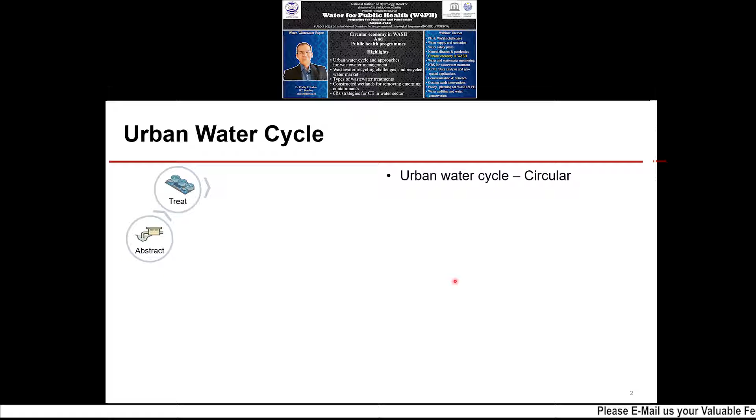First let us understand the urban water cycle. The natural water cycle is always connected. We abstract the water, treat the water, distribute, consume. Then there is a wastewater treatment plant, and then there is disposal. So this is our urban water cycle - that is how we are doing it.

But currently, a lot of urbanization and different stresses are causing impact, and this cycle has become linear. That means we are abstracting, treating, distributing, consuming, and again treating and disposing of, but there is no recycle or reuse happening. We are polluting the water systematically.

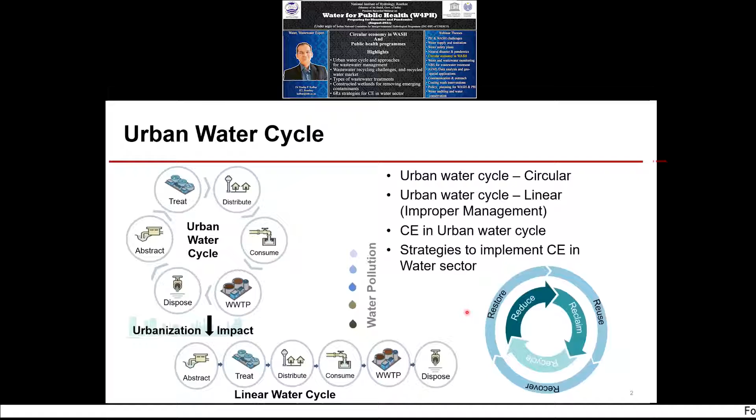So it is very important to have a circular economy approach in the urban water cycle, and there are strategies to implement circular economy in water. In this presentation, I will be talking about reducing consumption first of all, reclaiming, recycling, reusing, recovering, and restoring the water in different forms in different sectors that we come across.

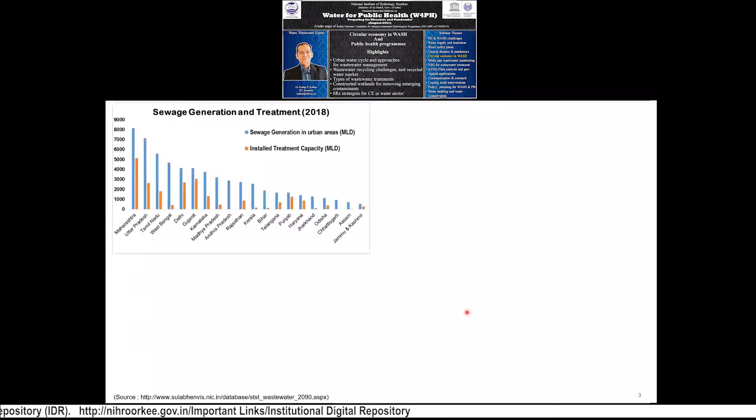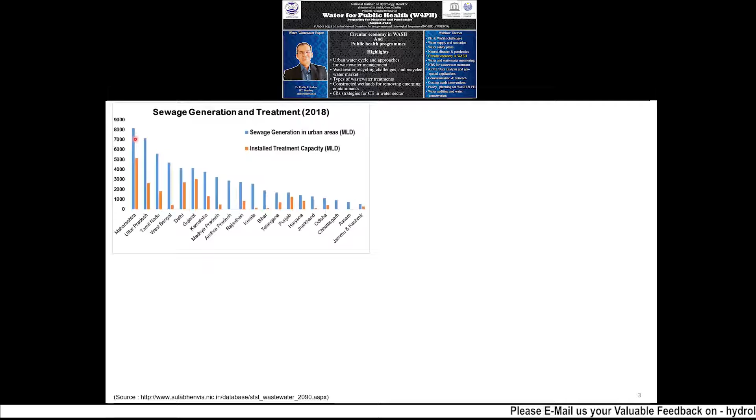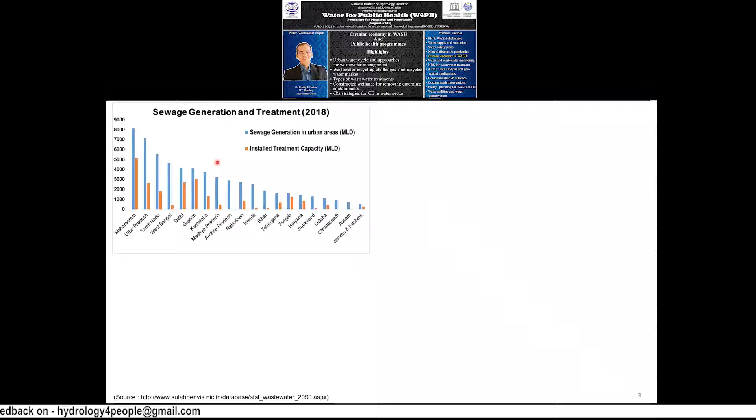First, let us take a look at sewage generation and treatment. This is very recent data across the states - you can see all the states are polluting, generating a lot of sewage, which is polluting rivers and lakes. We have a treatment gap. Some states are trying hard to create sewage treatment infrastructure, while some states are lagging - for example, West Bengal, Kerala, and Bihar.

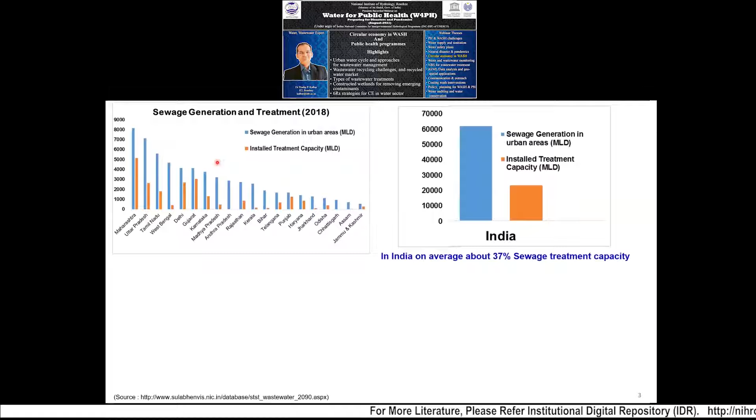These are the states which are lagging, and some states are going further, but still the gap is huge. So across India, on average, there is only 37% sewage treatment capacity. That is the challenge we have - a huge treatment capacity gap.

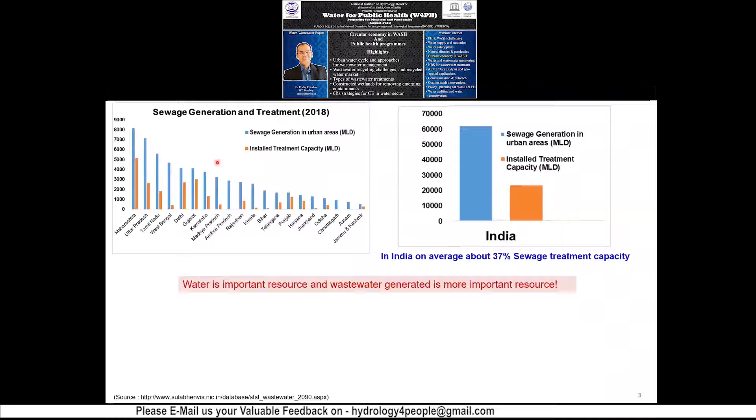Water is an important resource, but generated wastewater is an even more important resource. We always talk about fresh water, but wastewater generated is more important because it also has a carbon capacity to generate energy. There is nitrogen, there is phosphorus - many of these nutrients and resources are there. So it's a very important resource.

If you look at the installation capacity, we have around 1600 STPs across India, with around 37,000 to 38,000 million liters per day treatment capacity installed. Out of that, operational STPs are only around 1,100, and operational treatment capacity is around 26,000 to 27,000 million liters per day.

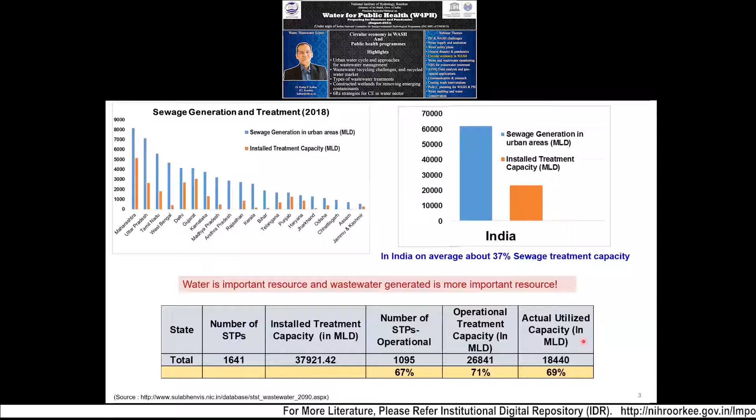We also have a problem with utilization, because many times treatment plants are installed without thinking whether there is a feeding network available, whether sewage collection is happening or not. People enthusiastically install sewage treatment plants without considering other sanitation aspects - whether people are using toilets, whether people are connected with the sewerage system or not. So capacity utilization of the entire infrastructure in the water sector is a big challenge.

So what happens is we have to treat the sewage, the untreated grey water, to some treatment standard. Historically we have been following Schedule 6, which comes from the Environment Protection Act 1986, where we have been given guidelines that we have to treat the water for 30 milligrams per liter.

And if there is public sewers, the municipality will have a sewage treatment plant, and they will treat it back to 30 milligram per liter so that it can be disposed of in lakes and rivers.

But the problem is, historically we have these guidelines, but our lakes and rivers are still polluted even with these standards. So a lot of public interest litigation has been filed in the Honorable Supreme Court, and now the Honorable National Green Tribunal is also taking cognizance of these cases. So these standards were challenged many times, questioning whether 30 milligram per liter is sufficient for maintaining good water quality in the systems. So we then have desired water quality for recycle also.

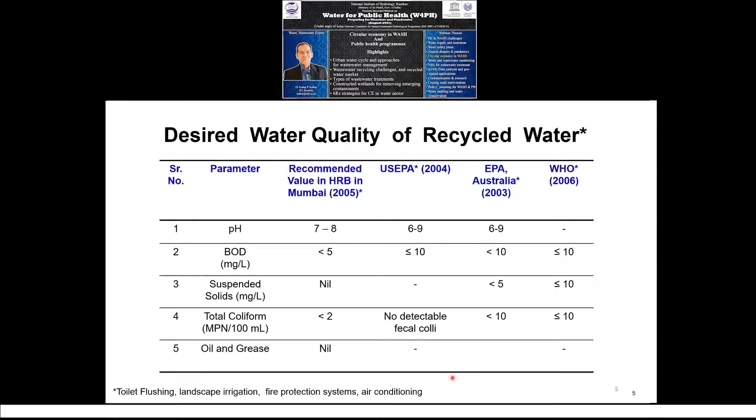So the thought was given that all high-rise buildings that are 21 stories and above will have recycling of sewage. However, the challenge is how we can enforce it, because enforcement in India is not done very properly. So although the norms are there, implementation is a big challenge.

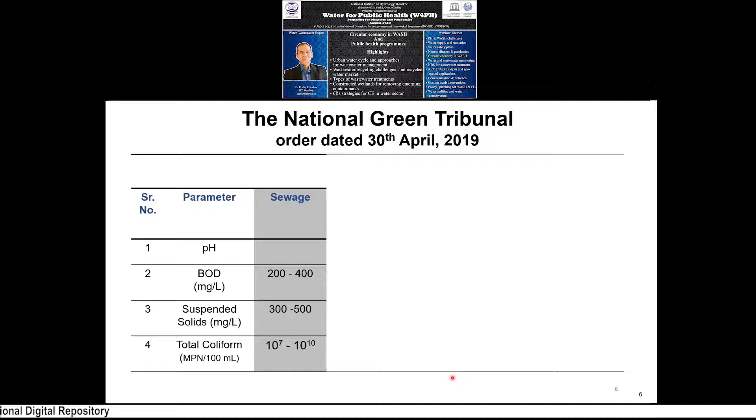Now, as I said, the Honorable National Green Tribunal has taken cognizance of the PILs that have been filed, and there was a lot of deliberation by committees, and then they issued an order on 30th April 2019 regarding the standard for treated sewage.

This was the committee's recommendation to the NGT, that in metro cities like Mumbai, Chennai, Delhi, Hyderabad, you have BOD of less than 10 milligram per liter for discharge into ambient water sources such as lakes and rivers. For class 1 cities, meaning population of 1 lakh and above, it is 20 milligram per liter, and for other tier 2 cities, class 2 cities, or emerging towns and rural areas, it is 30 milligram per liter.

Now what has happened is, they have said all water resources are the same, and we cannot differentiate between rural and urban areas, so these standards are applicable to all cases. So this is the recent order issued by the National Green Tribunal.

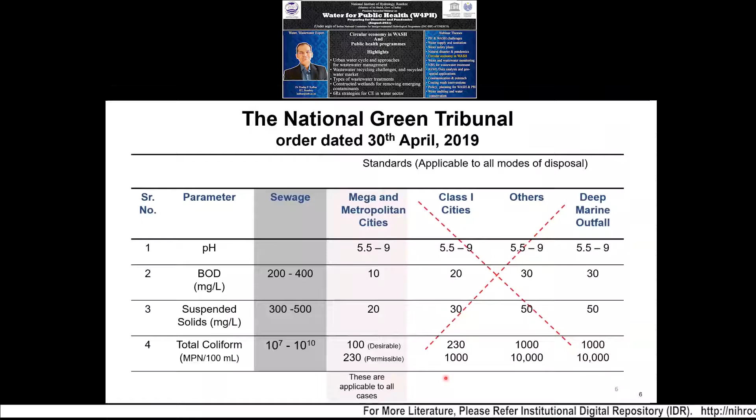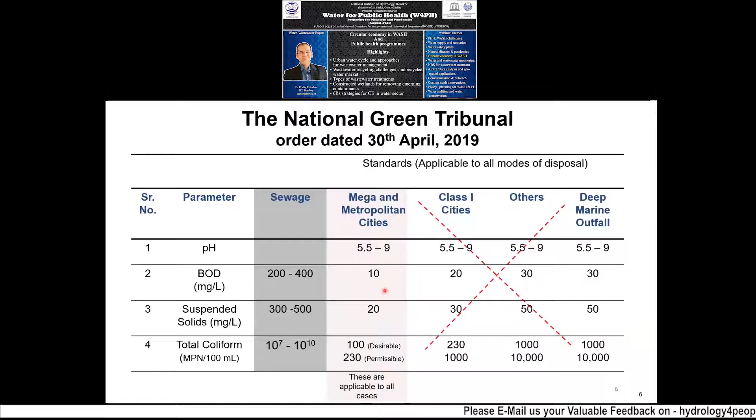Now this poses two challenges. One is that, as I told you, 37% is the established sewage treatment capacity, and those are for 30 milligram per liter discharge standards. Now all of that 37%, around 26,000 to 37,000 million liters per day, has to be upgraded to the 10 milligram per liter standard. So that is one big challenge for us.

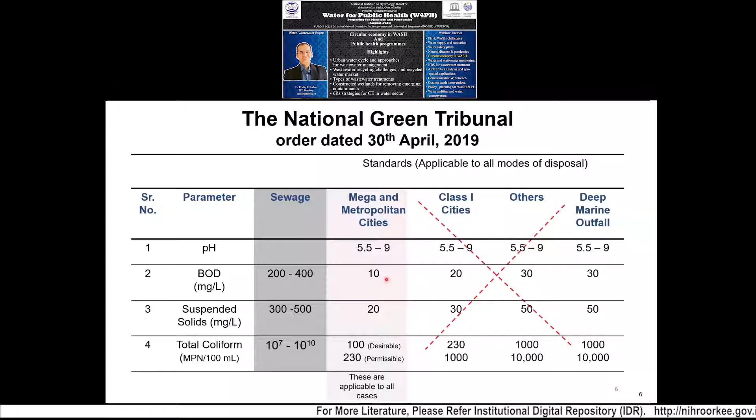And then also, filling the gap of the remaining infrastructure, about the remaining 63% capacity to be installed in coming years, it has to also meet this 10 milligram per liter standard. So basically our local bodies and state governments need huge funding and support for creating this infrastructure.

So we need very different approaches for wastewater management to achieve these targets, to respond to these disasters, pandemics, and new regulations. So let us understand the prevention and conservation side of wastewater management.

First, we have to educate our people and citizens about reducing consumption and putting in efficient devices, because that is the major role it will play in terms of reducing the stress on fresh water. If we are not working on this and only talking about treatment, we will never be able to catch up with the problem. So that is one big arm that we have to work on.

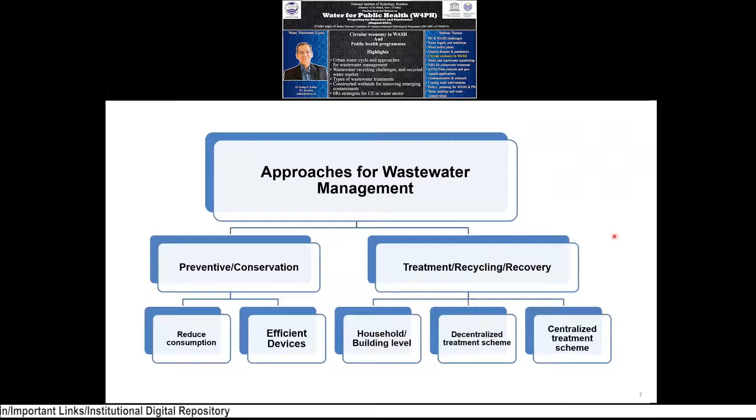And then you talk about treatment, recycling, or recovery. So we have to start with treatment, but now we have reached the stage where investing only in treatment is not possible, because even if an urban local body gets capital funding from the World Bank, state government, central government, or any other organization, the operational cost itself is not able to be coped up by urban local bodies. So we have to make this treatment side a revenue side. We have to recycle and recover, and the policies and guidelines around that need to be developed. So we have household or building level treatment, decentralized treatment systems, and centralized treatment systems.

So at all levels this can be implemented and has to be implemented to make the circular economy possible. Coming to the treatment side, this module is very introductory on the treatment side, and you can refer to other literature or videos.

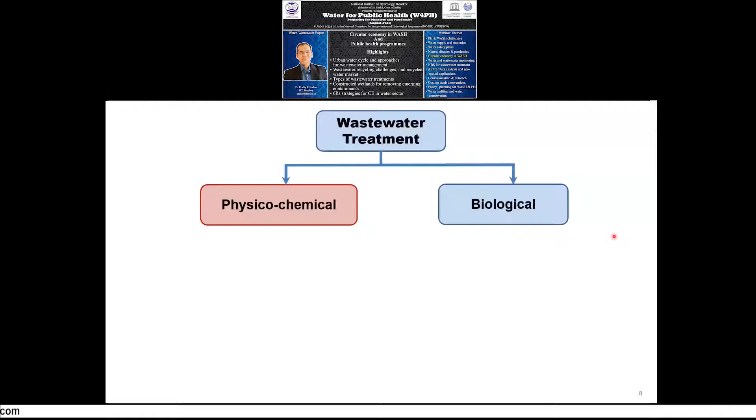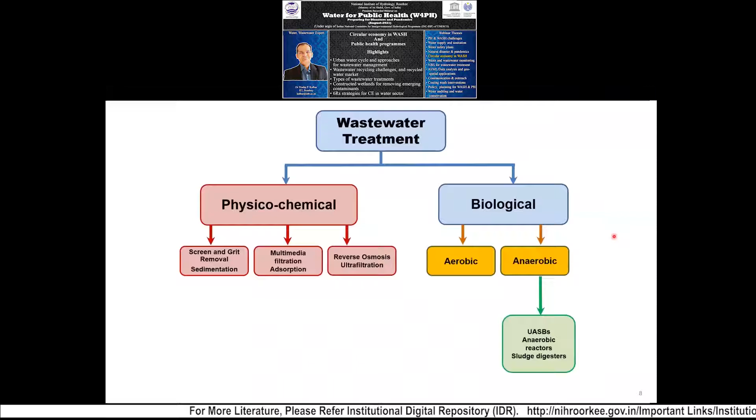But you can see there are a number of technologies. There is no dearth of technology for treating any kind of wastewater, whether domestic or industrial. We have physico-chemical, biological, aerobic, anaerobic systems. So there are many such treatment systems available - aerobic, suspended growth, attached growth, UASB anaerobic systems. I cannot name all of them, but technology is not the issue.

Just remember, that is the one key message I want to give - number of technologies are there. Then what is the challenge? What is currently wrong in the current approach is we have cities where there are number of households consuming water from far-fetched reservoirs. For example, for Mumbai, it is 100 kilometers, 200 kilometers from where the water is coming.

Then we are consuming detergents and chemicals in the houses, we are consuming food in the houses. All that is consumed, and we are discharging wastewater, which is generated through feces and other bathroom and kitchen washings, and washing of floors. All that is contributing as wastewater.

Now what we are doing historically is creating centralized treatment systems and trying to treat it. So the treatment network has to be laid, a lot of investment has to go in, and operating this plant has not been very successful. In many locations I see the plants are not operating properly. So what is happening - the pollutants are escaping in the effluent or in the sludge form. We are at a loss.

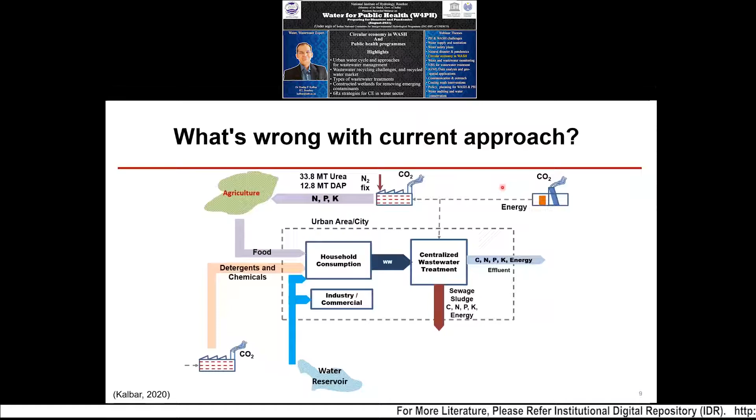Now additionally, what we are doing is putting food which is produced using artificial fertilizers such as urea or diammonium phosphate. So what is happening - we are fixing nitrogen with huge amounts of energy, which is producing carbon dioxide, and that is paid by energy resources. So huge amounts of energy are also associated with this problem of providing food to us, or these detergents or chemicals.

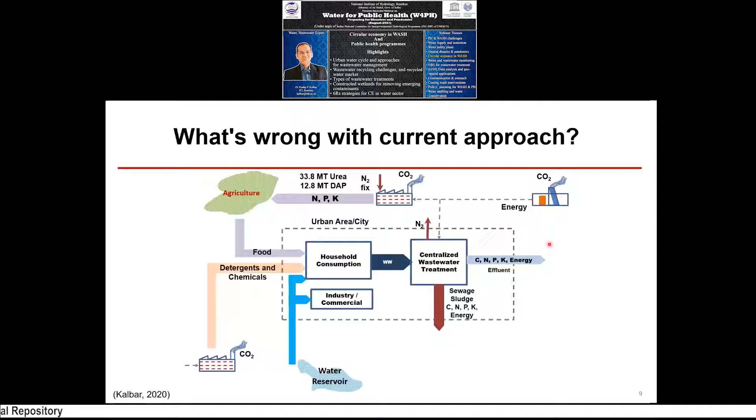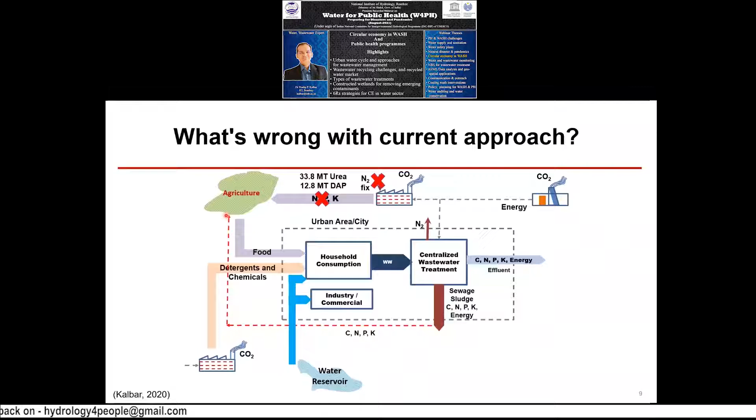Now in the centralized wastewater treatment, we are again putting back energy to take out this nitrogen. So we are fixing the nitrogen, we are consuming the nitrogen, and again we are putting in energy. So it is not a sustainable loop - you can imagine, it's very simple, it is not a sustainable loop. So we have to first stop consuming artificial fertilizers, then create a fertilizer loop from the sludge or other recovery mechanisms, and give back to agriculture.

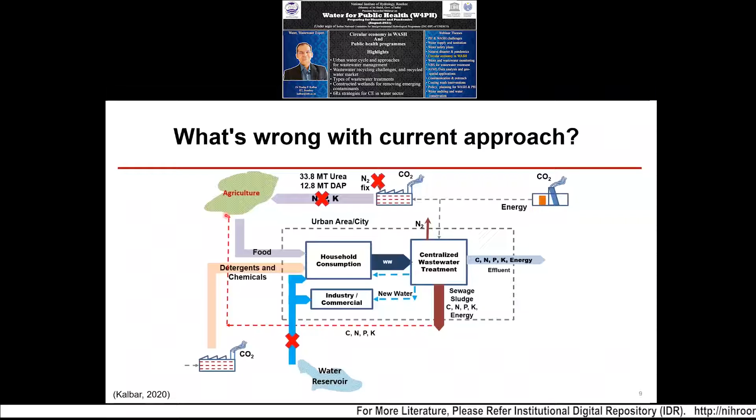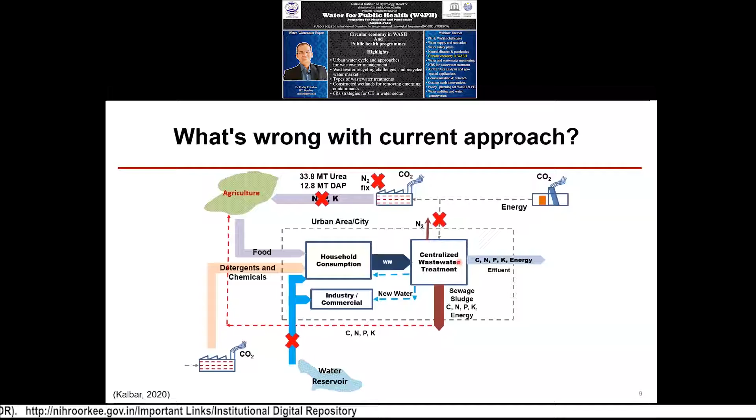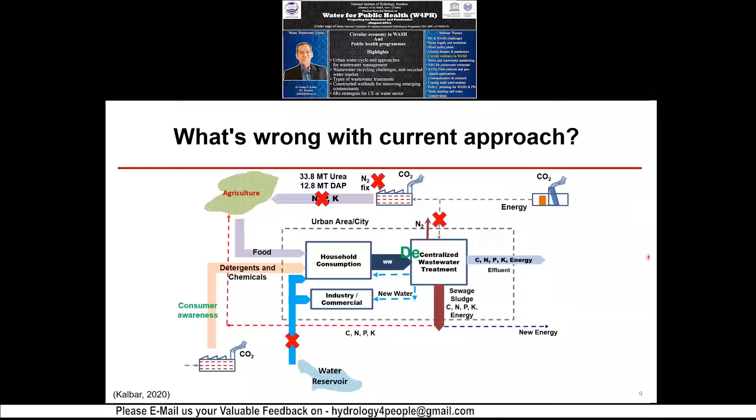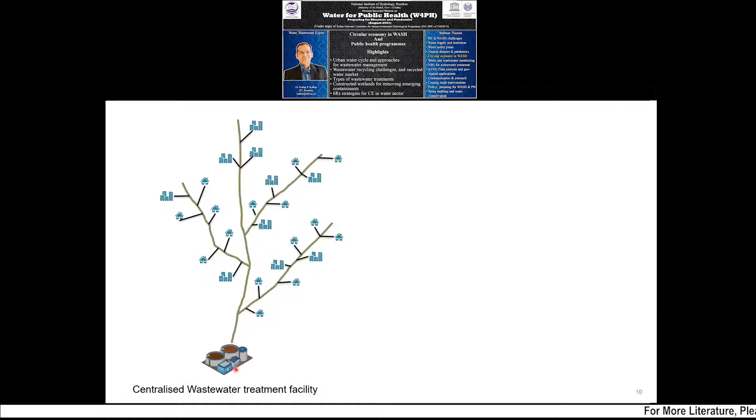And we have to stop consuming water from fresh reservoirs, and create our own water from the cities itself for secondary purposes, for industries or commercial use. So the energy required for the treatment system has to be minimized, and this is possible because of decentralization. If you decentralize the systems, using different models in cities and rural areas, we can do it. We have to make consumers aware. So let us discuss how this can be achieved.

Centralized means everything is taken out of the area, treated, and then put back if recycling is aimed - that becomes very costly. If you have a decentralized system where you collect at the neighborhood or community level and treat the water, more recycling opportunities can be created for decentralized treatment facilities.

The issue is too small systems will be difficult to operate. So we don't have to go for very small, household level or building level systems, because those are very difficult to operate. It has to be some appropriate scale - a very small system will not be synchronized, and the scale of economy will not be there.

On the other hand, if you create a very highly centralized system, it places other challenges in recycling of treated effluent and sludge, because after some point it will not offer any scale of economy. So we have to keep these two points in mind and then plan our sanitation infrastructure. Centralized systems additionally require deeper sewerage networks for flat terrain and are difficult to maintain.

So you have highly decentralized or highly centralized systems. The current comfort zone of consultants, state governments, and many stakeholders is to have highly centralized systems - one DPR they want to have and solve the problem, but that is not possible, that is not working well. On the other hand, people directly promote highly decentralized systems with only small building level or household level systems, which is also not sustainable.

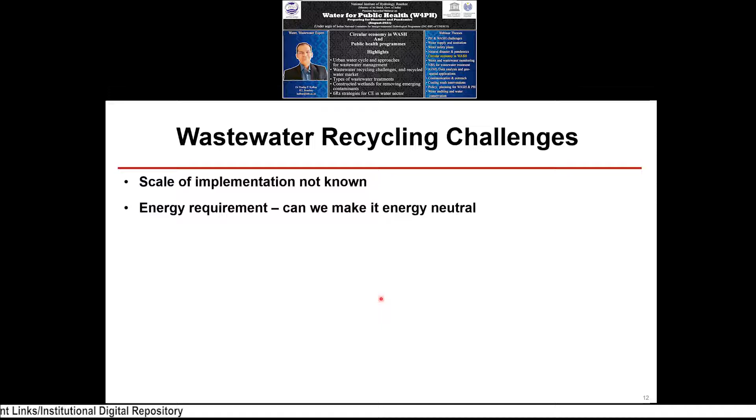So what are the wastewater recycling challenges? One is scale of implementation is not known; it has to be determined for every case. Energy requirement - can we make it energy neutral? Because we have to make the system energy neutral. Other resources, nitrogen and phosphorus - can we close the loop? We have to work not only on the treatment side, but also close the loop.

Pathogens - many times people talk about toilet to tap, but currently we are not ready. Our infrastructure is not ready, our capacity building is poor. The risks are very high if you just create water for human touch. Emerging contaminants, household chemicals - many. These are the very big challenges that we are having.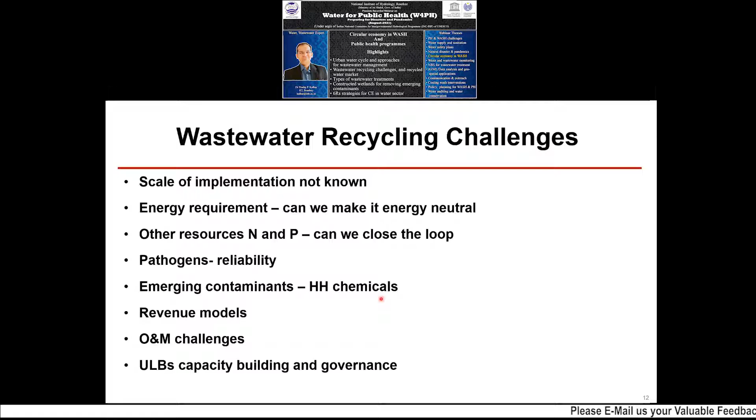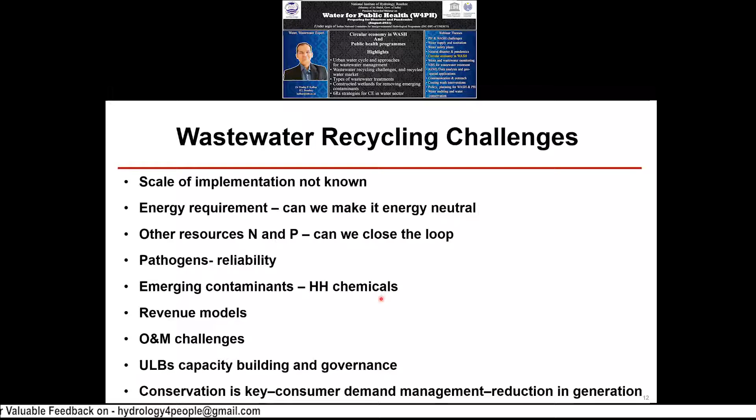Revenue models - who will maintain this treatment system? We need innovative revenue models. Operation and maintenance challenges, urban local body capacity building and governance - huge challenges are there. And conservation is key: consumer demand management and reduction in generation. These are the key issues we are facing in wastewater recycling.

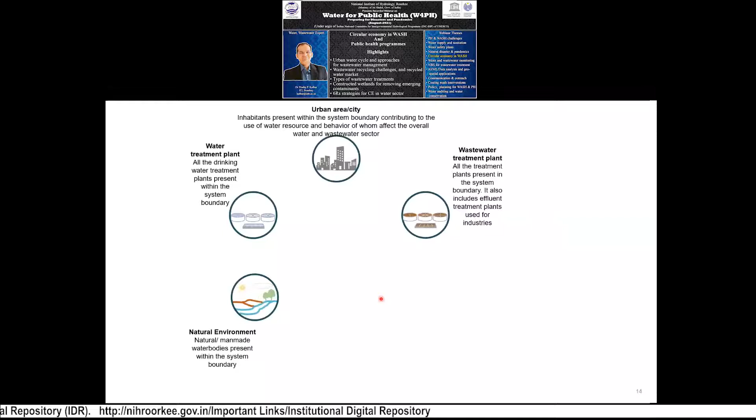So all this I have documented in my research group. We have a publication where we have documented this for our country - a review of circular economy in urban water.

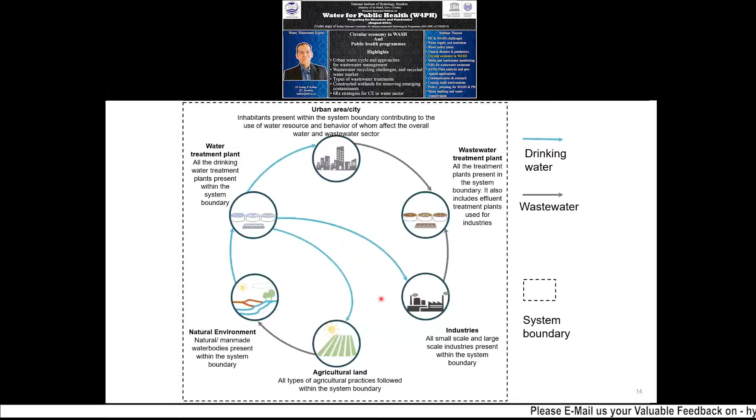What we have proposed is: we have natural environment, water treatment plant, urban areas, wastewater treatment plant, industries and agricultural land. Basically this is our system boundary for water, and water gets exchanged between these sectors. Wastewater is generated, and treated wastewater is disposed of without recycle or use.

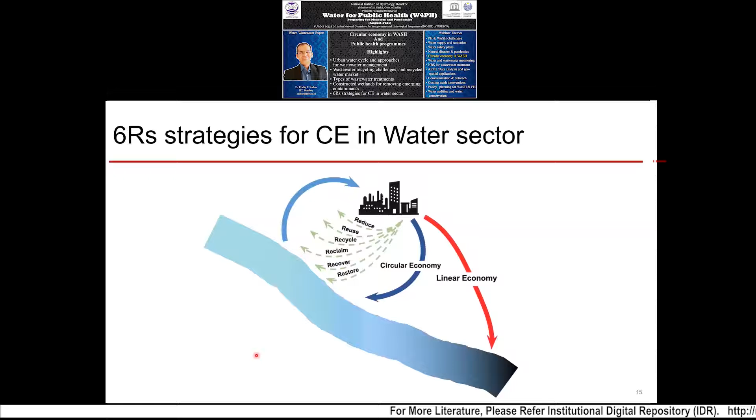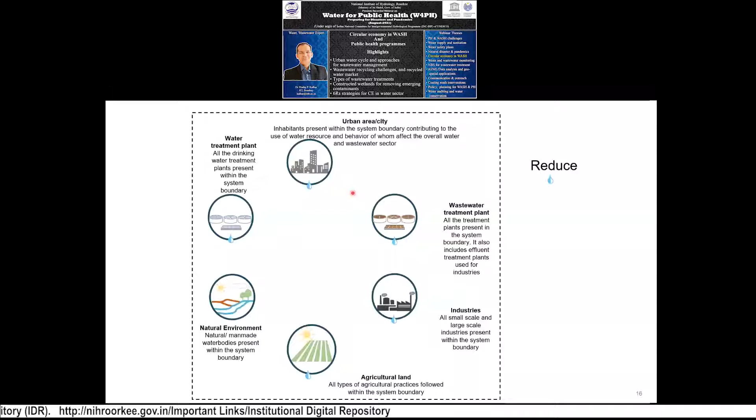So what we are proposing is to apply reduce, reuse, recycle, reclaim, recover and restore - these principles - to put this particular water back into other loops. So, moving from linear economy to circular economy.

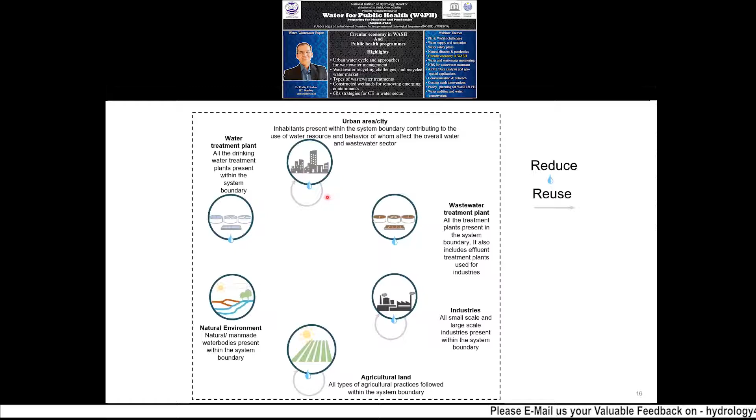How we can do that: first we have to talk about reducing water use in each sector. Then reusing - industries can create a cascading of reused water in urban areas, water can be used for secondary purposes. Then recycle - you treat the water and take it back for gardening, air conditioning, toilet flushing.

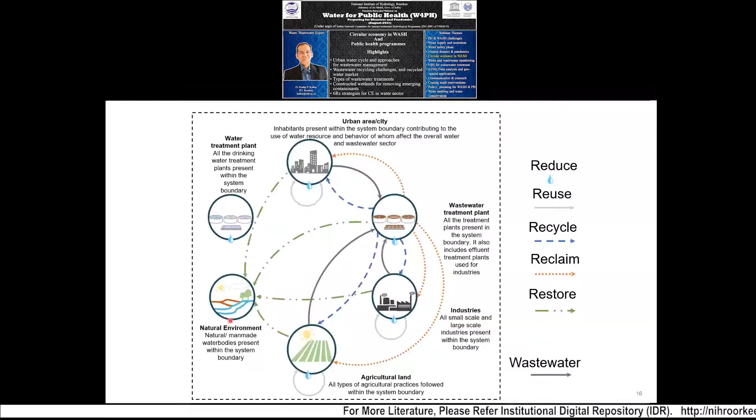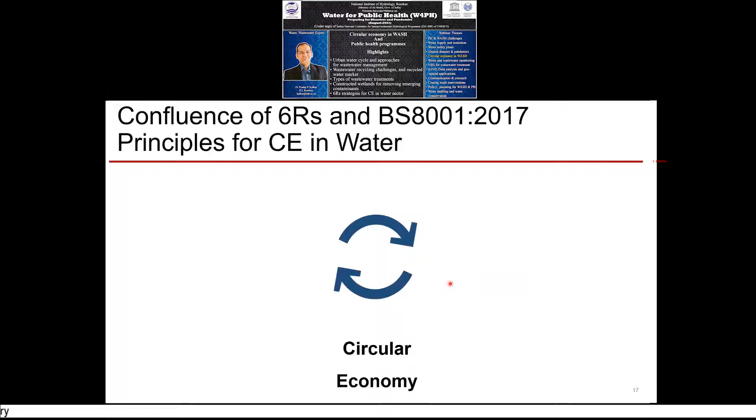You reclaim - industries can reclaim water from the cities, that is reclamation. Restore - excess recycled good quality water can be used for groundwater recharge and restoring. And recover - we recover energy from the sludge, carbon, nitrogen, phosphorus. These are the resources that we can extract.

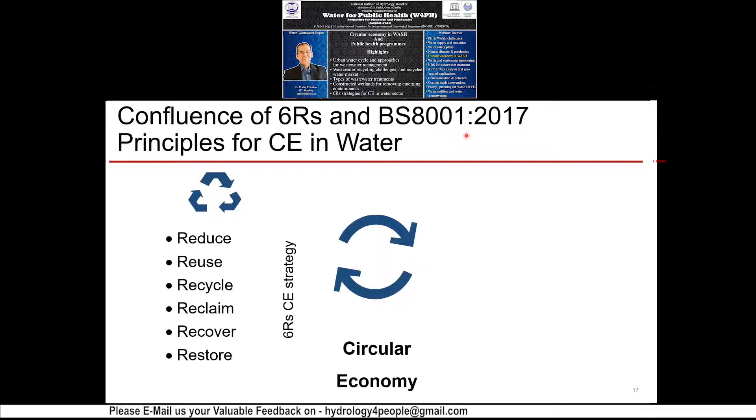So we have to make a confluence of these 6 Rs with the principles of circular economy in water, as given by British standards. So these are the six strategies of the 6 Rs, and these are the principles of systems thinking - we have to think in systems.

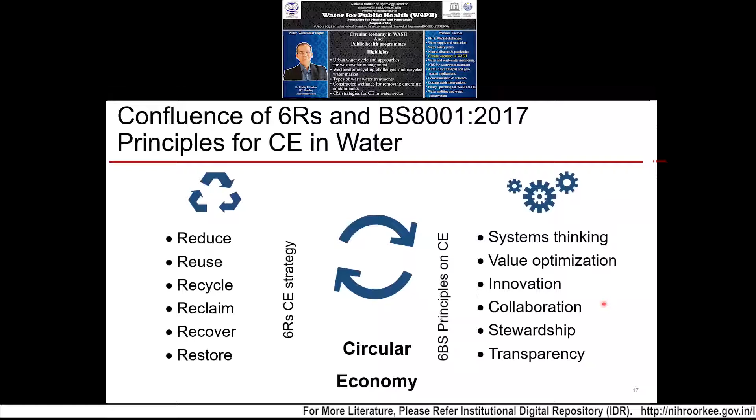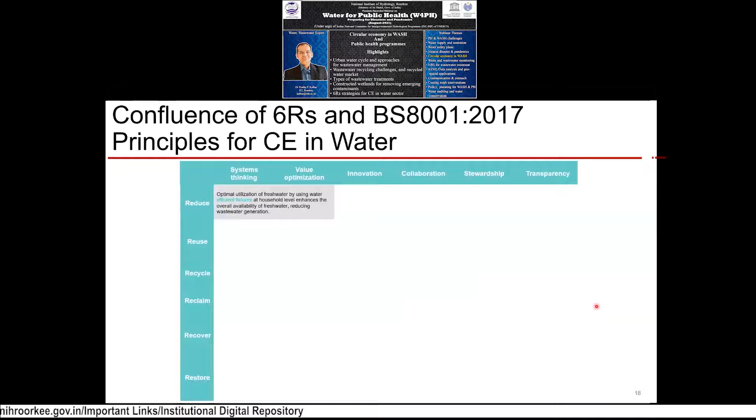Value optimization for every step has to be taken into account. Innovation, collaboration, stewardship, and transparency of data - how much water is consumed. A lot of data issues we have in India.

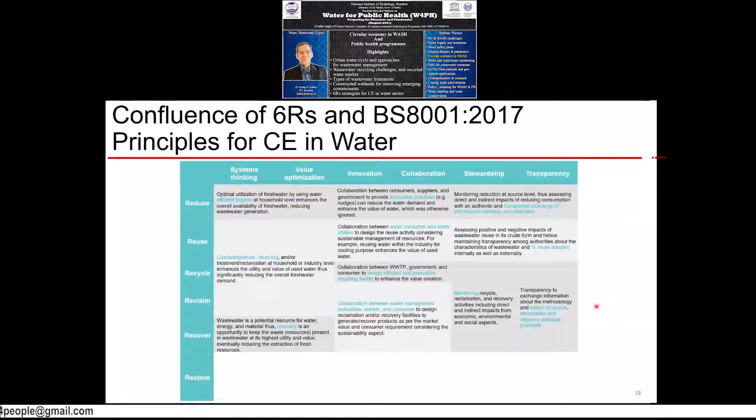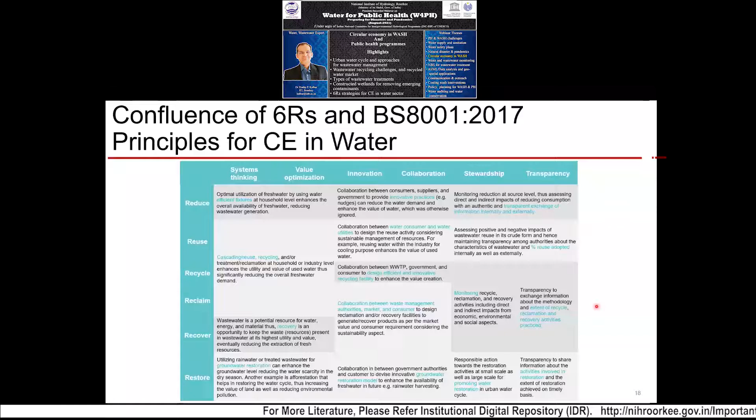So we have tabulated this just for an example exercise, and many other experts can contribute to this. For example, optimal utilization of fresh water by using efficient fixtures, innovative practices, policy changes, transparency of data between the urban local body and industry, cascading water consumer and water utilities. Basically, a number of ideas can be put in to fulfill this table - we have given one thought, but there can be many other thoughts contributing to this particular idea.

With collaboration from NIH and other partners in our IC EcoWS project, we are working on developing technology packages for various different cases across India.

For example, for building scale in dense urban context, there can be a number of technology options - sequencing batch reactor, MBBR, FBR or membrane bioreactor - some of which may need further polishing or treatment for effluent used for toilet flushing or other purposes. So many mechanized treatment systems are available.

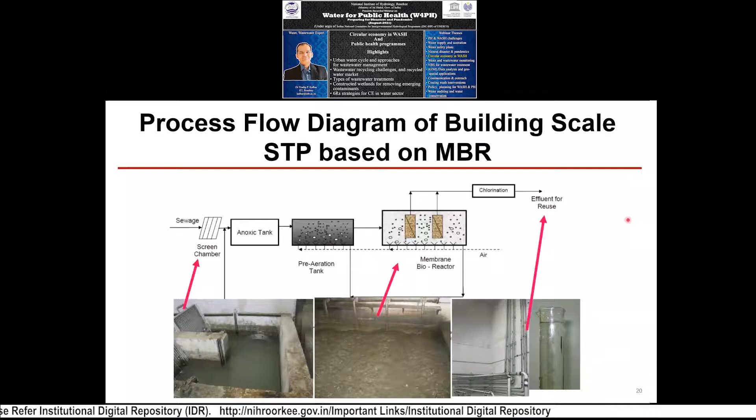This is one case study you can remember, where MBR is placed in the basement and the water is used for different purposes. If land is available, we can make use of natural treatment systems such as constructed wetlands, as shown here, where the septic tank is here and water is applied to these plants at the periphery of the compound.

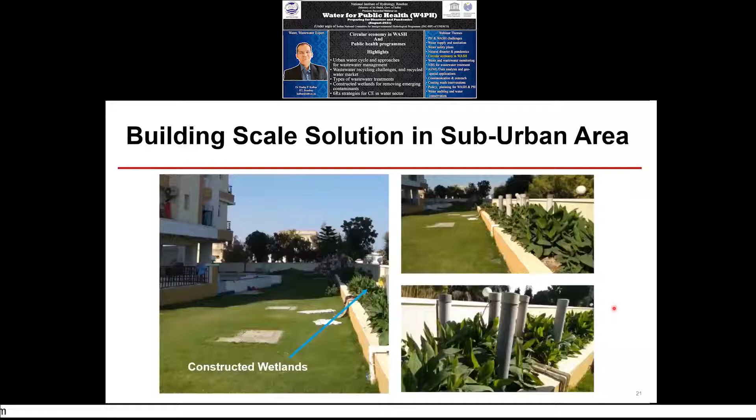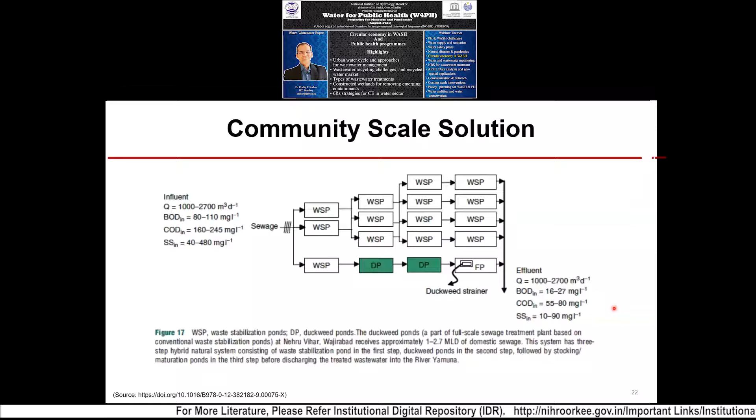And this also works wherever land is available. So the whole issue is urban local bodies have to plan this very upfront when they are planning expanded areas, when they are developing new housing societies.

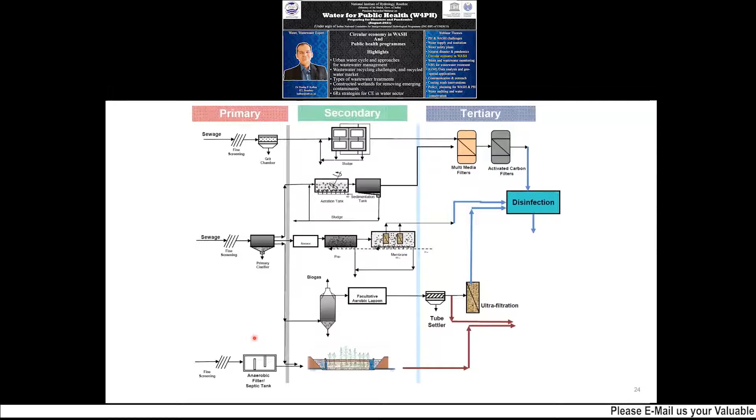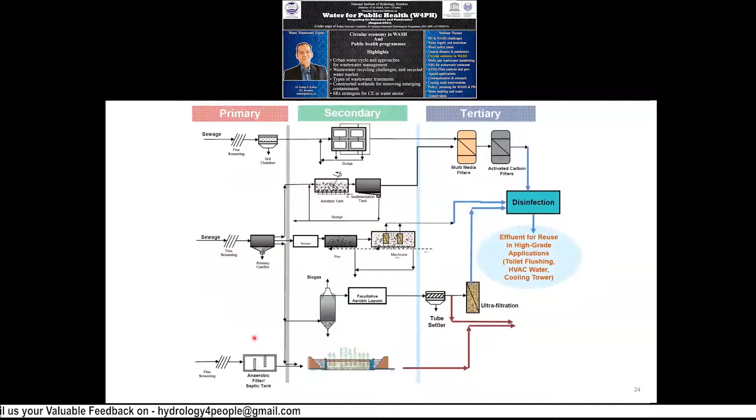There can be community scale solutions using stabilization ponds, duckweed ponds, and a number of case studies are there across India. The references I have given here, you can refer to these documents where a number of such resources are available.

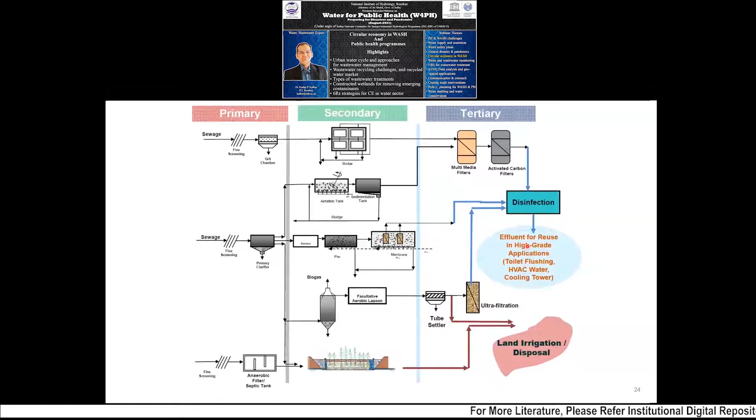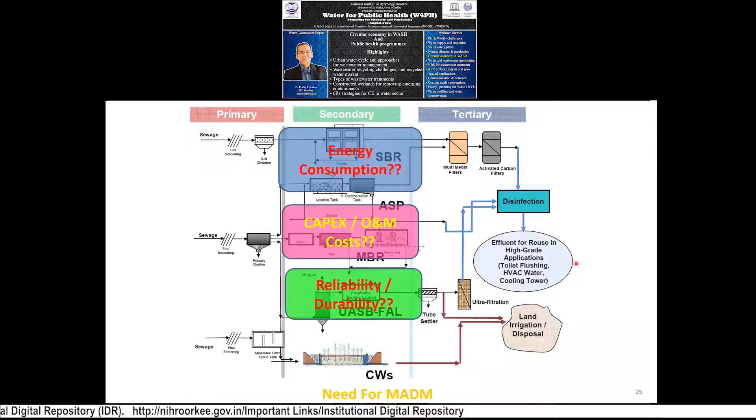Some technologies may produce water that is useful for disposal or land irrigation. You can make some polishing treatment and make use for high grade applications.

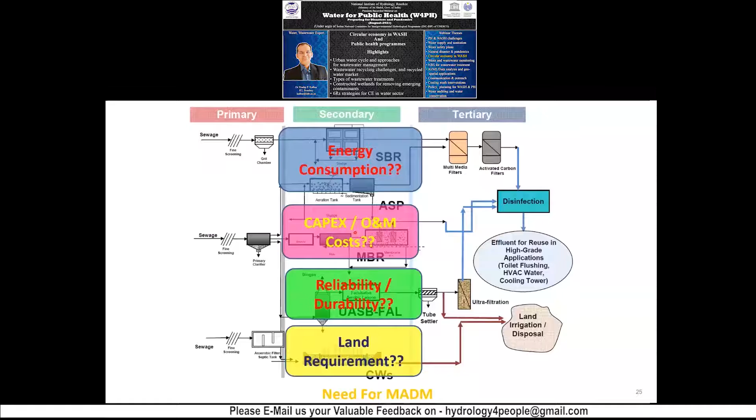The whole challenge is the energy consumption we have to take into account, the capital cost, operation and maintenance cost we have to take into account, the reliability and durability of the treatment system we have to take into account, and the land requirement. So a number of these issues are there which we have to consider when we take decisions.

So if you compare the mechanized treatment system and natural treatment system, there is a trade-off. For example, the mechanized treatment system has higher energy consumption but very low land requirement. Natural treatment systems such as constructed wetlands do not have energy consumption but require a lot of land.

So there is a trade-off for choosing the technology system. Mechanized treatment systems are more intensive but require less land. Considering the gap in treatment in India and progressive regulations, there is a need for installing new sewage treatment plants as well as augmenting the existing ones.

So there are two challenges we are facing - augmentation and installing new capacity. In either case, the challenge for Indian cities will be to achieve cost-effective treatment. So what cities are looking for is a very sustainable, self-sustainable solution.

Many projects have failed because somebody comes and funds the capital investment, but there is no operation and maintenance taken care of properly. So the capital expenditure usually can be arranged from several funding modes. However, constraints such as operational maintenance cost and land requirement limit the use of the variety of technologies available.

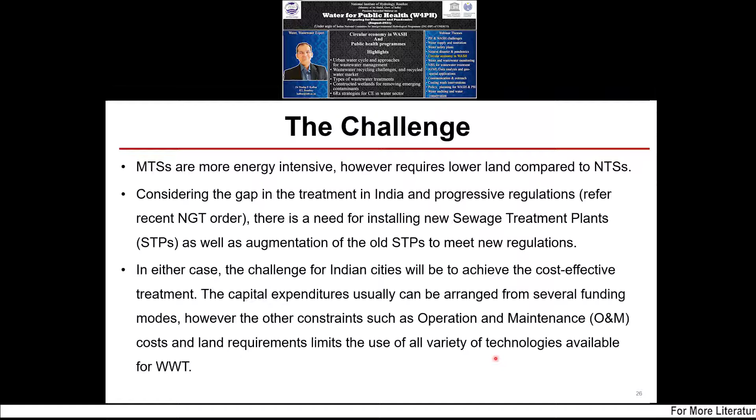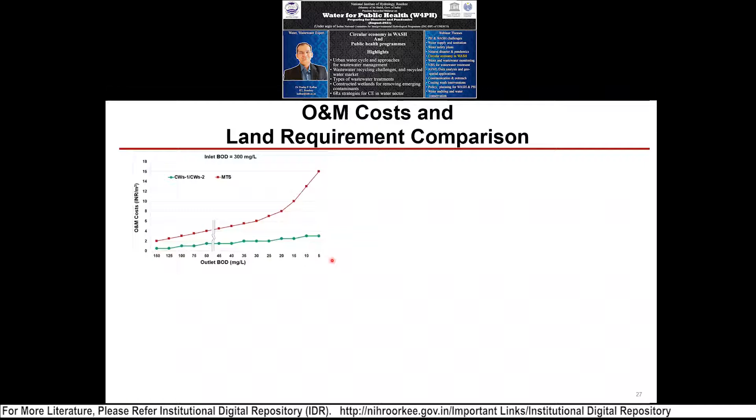So we have to focus the solution technology selection based on operation and maintenance. Capex can be managed, can be developed in one go. The major headache for cities or rural areas is to maintain the treatment system for the next 30-40 years, for a longer duration of time.

If you take the cost issue, O&M cost issue into mind now, on this analysis that we have done, on the x-axis we have the outlet BOD, and y-axis we have operation and maintenance cost. Here you can see the mechanized treatment system costs are very high because the energy costs are very high. The energy required for aeration and other mechanized treatment is very high, whereas natural treatment systems have very low operation and maintenance cost.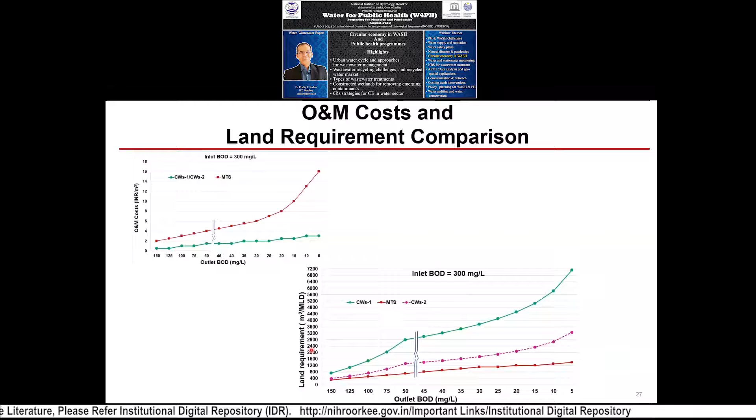And this is the land requirement for a variety of treatment levels. On the x-axis this is treatment level starting from, let's say, 150 to 5 milligrams per liter at the outlet BOD. Inlet BOD assumed in this analysis is 300 milligrams per liter, after which primary treatment is applied. So the land requirement is very high for natural treatment systems.

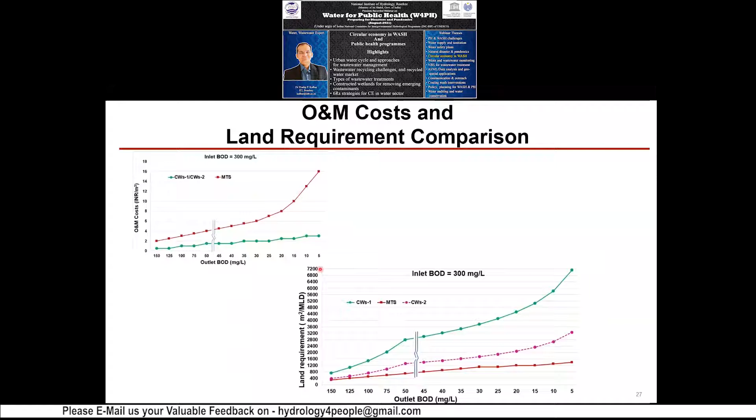You can see the constructed wetland - this green one is shallow bed, and this pink one is deep bed wetlands. So even with the deep bed, you need a lot of land. That is the challenge.

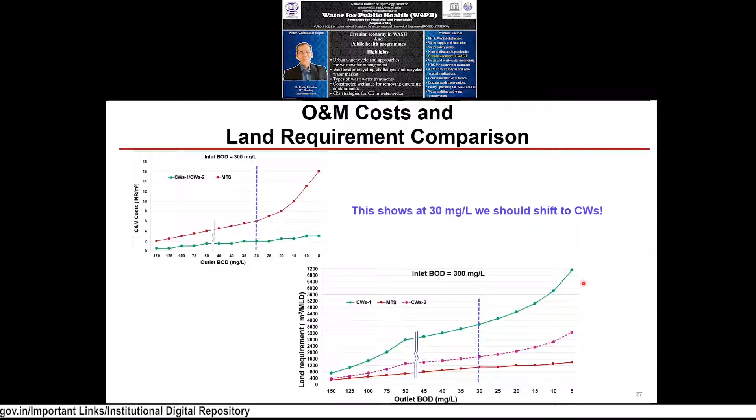So we have to make a confluence of these two technologies, and this shows that at 30 milligrams per liter we should shift to constructed wetlands, because up to 30 milligrams per liter the major chunk was taken care of by the mechanized treatment system with very low land requirement, and then we can move on to the constructed wetland so that the remaining BOD load can be taken care of by it.

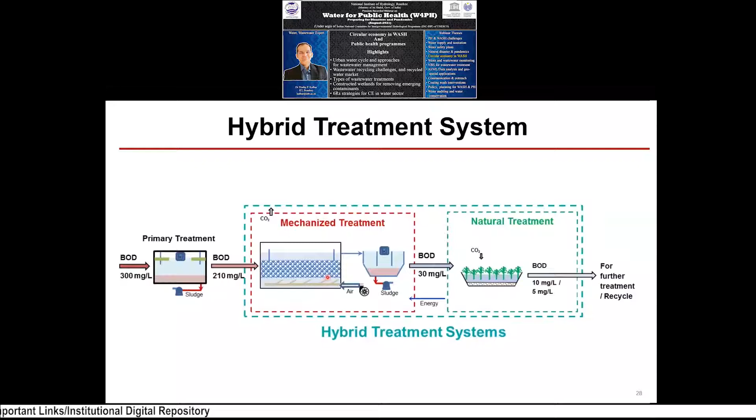So this hybrid treatment system is proposed as one of the solutions, where we move from mechanized treatment system to natural treatment system, and this will create long-term sustainability because your operation and maintenance costs are very low. So you start with 300 milligrams per liter, do a primary treatment, then your inlet may become 210. This configuration of mechanized primary treatment will vary for different input values.

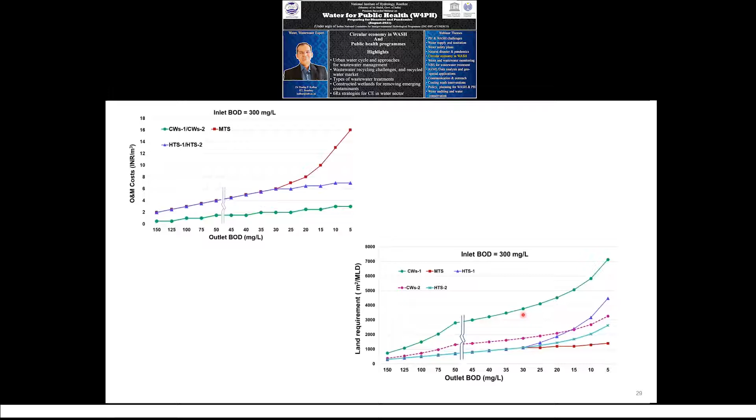If BOD is very low, then we can do away with only an anaerobic filter or some very simple treatment system. We do not even need a mechanized treatment system before going for natural treatment. So if you make a hybrid treatment system, shown here in blue, you can see the operation and maintenance cost comes down.

The land requirement for hybrid treatment system is lower than the natural treatment system. So this is how we can achieve the more sustainable solution.

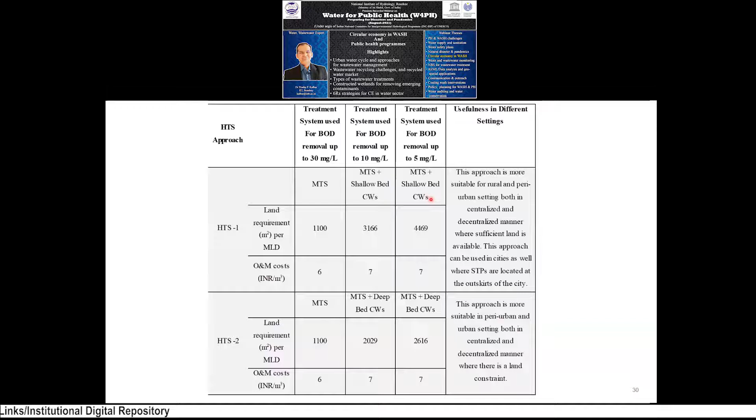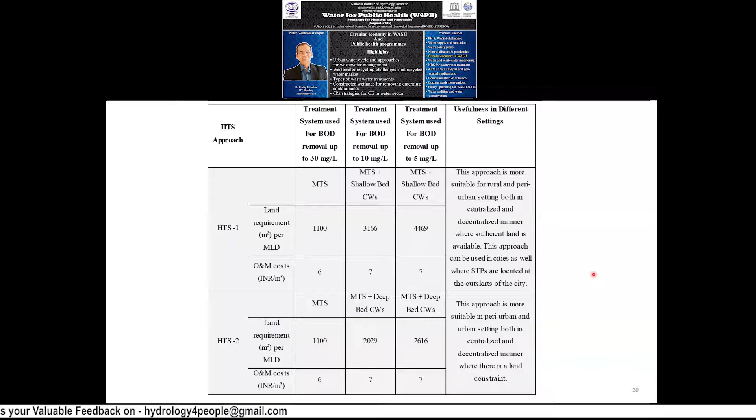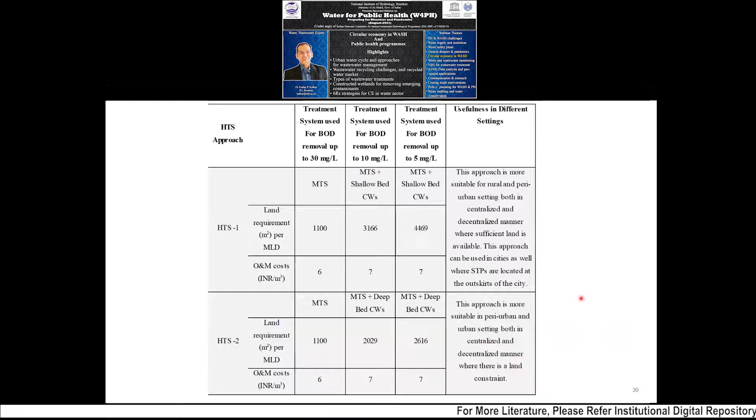In this table I have given different treatment levels of 30, 10 and 5 milligram per liter. If you go for mechanized treatment system followed by shallow bed constructed wetland, this is the given land requirement, operation and maintenance cost. This is for hybrid treatment system 1, and this is for hybrid treatment system 2.

So this is one analysis that I have given, and it is published. You can search for hybrid treatment system, you will find the paper published in Journal of Clean Technologies and Environmental Policy. So what are the additional benefits of hybrid treatment system?

It is not only the O&M cost, because if you propose hybrid treatment system to be implemented throughout India, total annual energy saving of about 200 gigawatt of energy in the existing STPs, and 340 gigawatt in the upcoming STPs will be there because of installation of this hybrid treatment system, because you are saving on operational energy.

Additionally, there will be associated reduction in CO2 emissions, because you are not using electricity from the grid, which is now coal fed. Around 60 to 70% energy is coming from thermal energy. So your CO2 emissions will also be reduced. So it will help in climate change and other sustainable development goals.

The HTS approach, hybrid treatment system approach, can easily be implemented in around 400 cities in India, having population between 0.1 to let's say 10 lakhs, with cumulative population of about 200 million in around 7,400 towns. So a lot of scope and potential is there.

For the 53 cities having population of million plus, adoption of HTS approach is possible for STPs located outskirts of the city, or decentralized infrastructure approach can also be adopted.

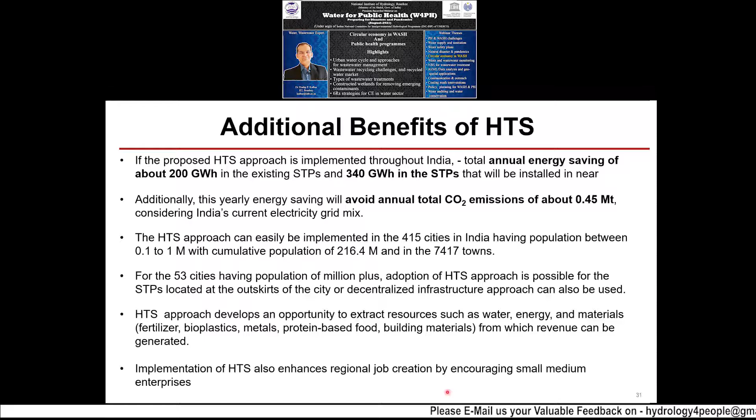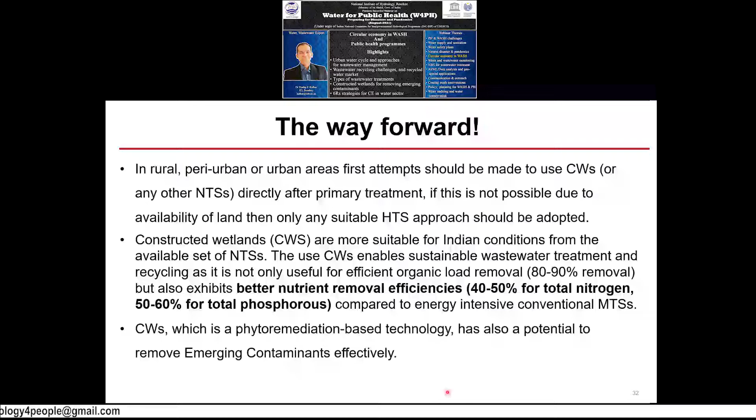So implementation of hybrid treatment system also enhances regional job creation by encouraging small and medium enterprises. Because we are avoiding mechanized treatment system, hybrid treatment systems give a boost to the local economy. Hence it is more suitable for Make in India or Atmanirbhar Mission. Whatever initiatives the central government has, it will support that.

So the way forward is, in rural, peri-urban or urban areas, first attempt should be made to achieve treatment using constructed wetland directly after primary treatment. If this is not possible due to availability of land, then only a suitable HTS approach should be adopted. So the constructed wetlands are more suitable for Indian conditions from the available set of natural treatment systems, and there is a lot of literature about it.

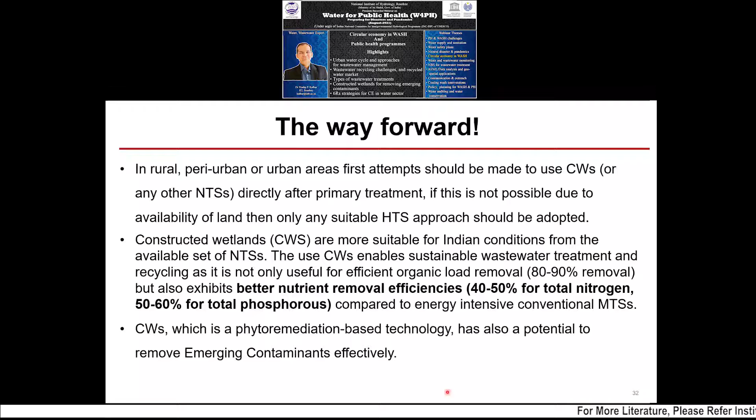The use of constructed wetland enables sustainable wastewater treatment and recycling, as it is not only useful for efficient organic load removal, but nutrient removal efficiencies and pathogen removal efficiencies are also very good. So with a very low cost, you are getting very good efficiencies. Constructed wetlands, which is a phytoremediation based technology, have potential to remove emerging contaminants effectively.

In summary, there is no immediate need for toilet to tap, there are enough other avenues for recycling. First we have to develop a practice of recycling using this hybrid treatment kind of system paradigm. Recycling at the point of use, because if you take the sewage out of the boundary of the habitation and again try to create a recycling network, it is very costly and not feasible. So recycling at the point of use or sale is very important.

Scale of implementation of the solution is more important than the solution itself, because if you create a very highly centralized system, nobody is going to do anything with that. It will become a white elephant, very difficult to operate and maintain.

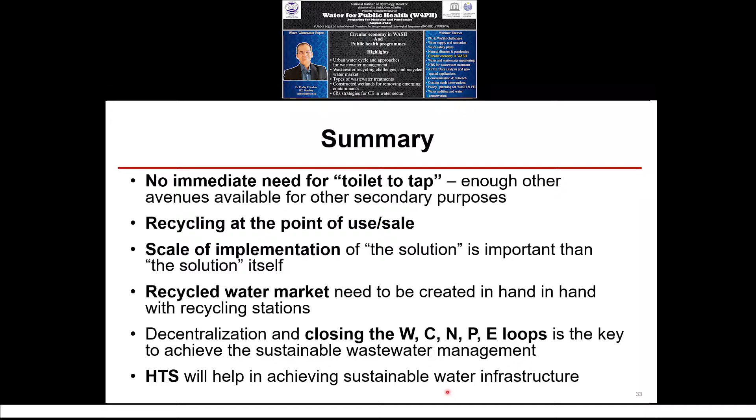So recycle water market needs to be created in hand with recycling stations. We have to work on creating a recycling market, changing the policies, changing the guidelines, changing the bylaws, and decentralization, closing the water, carbon, nitrogen, phosphorus, and energy loops is the key to achieve sustainable wastewater management. And this entire hybrid treatment system approach that I have presented will help in achieving sustainable water infrastructure and water and sanitation infrastructure. Thank you.